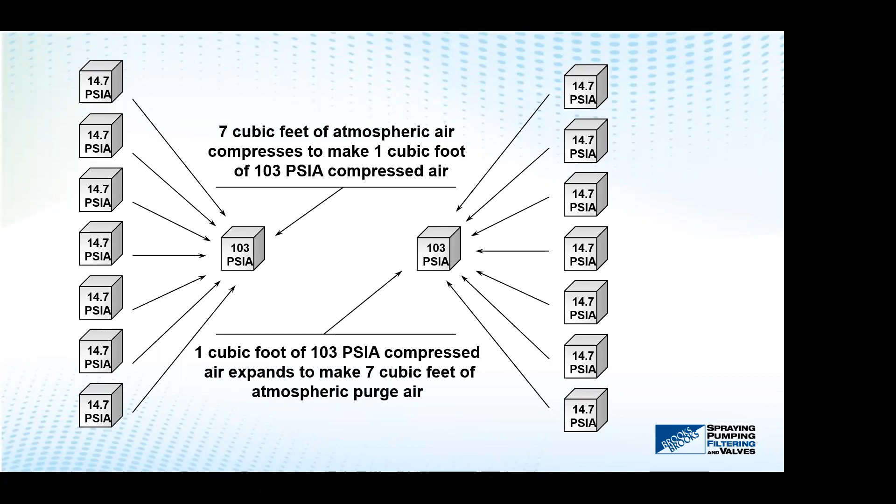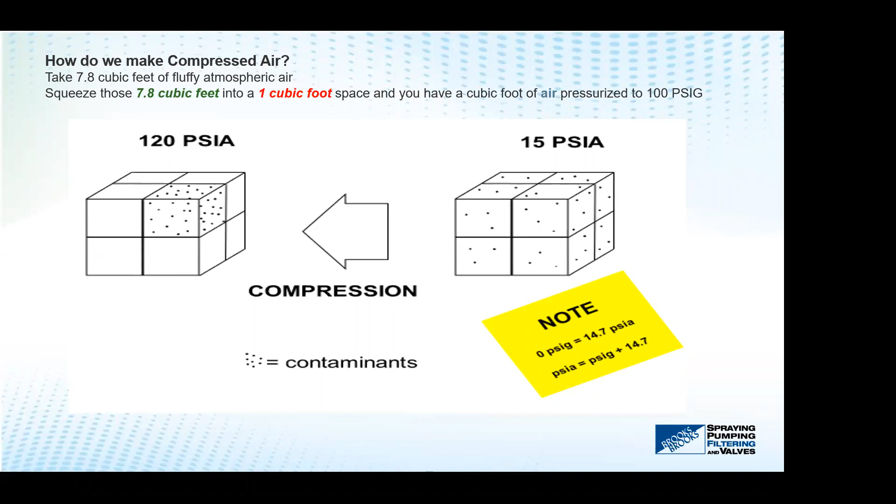Basic knowledge is that as we compress the air, temperature increases. The pressure increases, which is a normal factor. And the main factor that we're concerned about is that the contaminants in the air also increase approximately 8-fold, or 7.8 times.

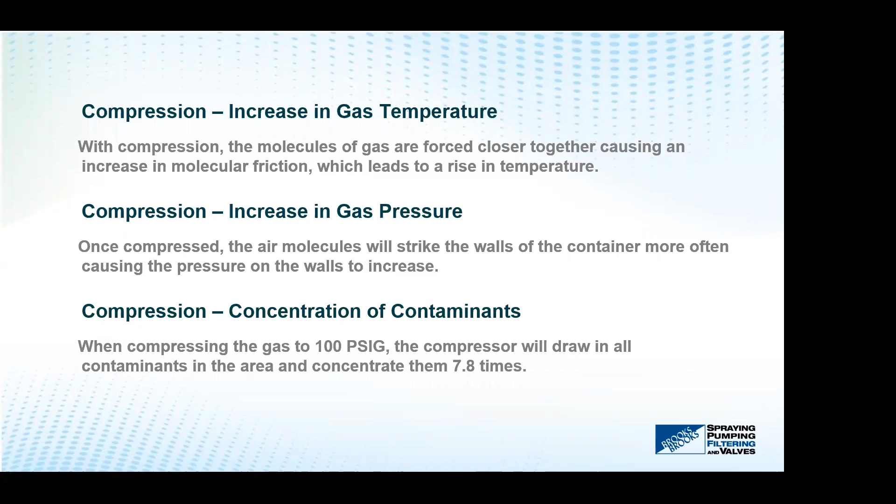The dew point of air is basically the transition point when vapor turns into a liquid, when the air can no longer hold that amount of moisture in vapor form and it changes from a vapor into a liquid state. That's when relative humidity becomes approximately 100%, and we've exceeded the saturation point of the air, so it can't accept any more moisture. That's illustrated on the following slide.

At minus 40 dew point, the air is relatively dry. This illustration shows that when you expand that air from a minus 40 dew point, 7 times larger, to atmospheric pressure, the dew point actually gets drier. As previously stated, when we take atmospheric air, which we don't see the moisture in, and compress it to 100 psi, we get condensation, we get saturation. So if you have dry air at a minus 40 dew point and expand it to atmospheric pressure, the air gets drier because now you have 7 times more volume for that same amount of moisture that was previously dry to a minus 40 dew point.

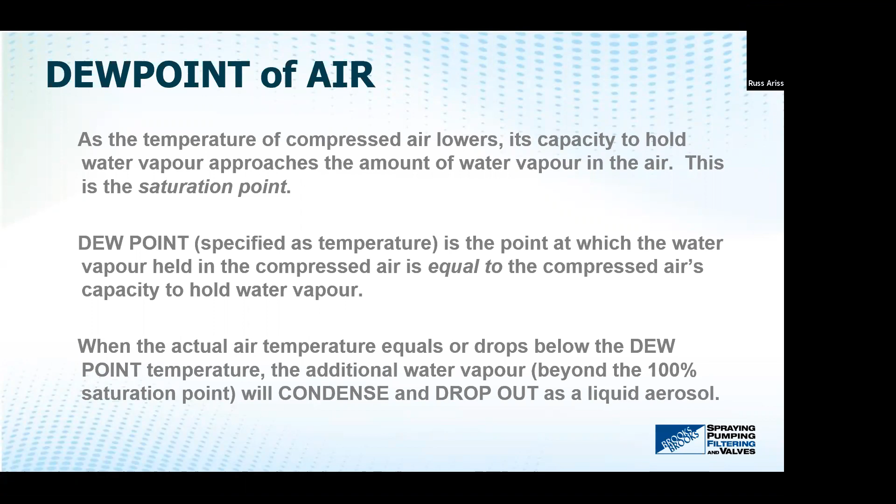The following illustration elaborates on the typical purification systems designed for instrumentation air. We try to attain a -40 dew point, and as previously stated, that's the temperature when condensation occurs. You would not get any water droplets or the change from vapor into liquid form until you descended the temperature below -40 degrees Fahrenheit.

Sometimes we get instances where, Russ, you indicated earlier this week, people were assuming they were getting good dew point, but they were perhaps reading atmospheric pressure instead - we'll see that better on the next slide. This image further shows that a -40 dew point at 100 psi, once expanded to atmospheric pressure, since we have 7 times more volume, the actual dew point gets lower since we're expanding that air to a lower pressure.

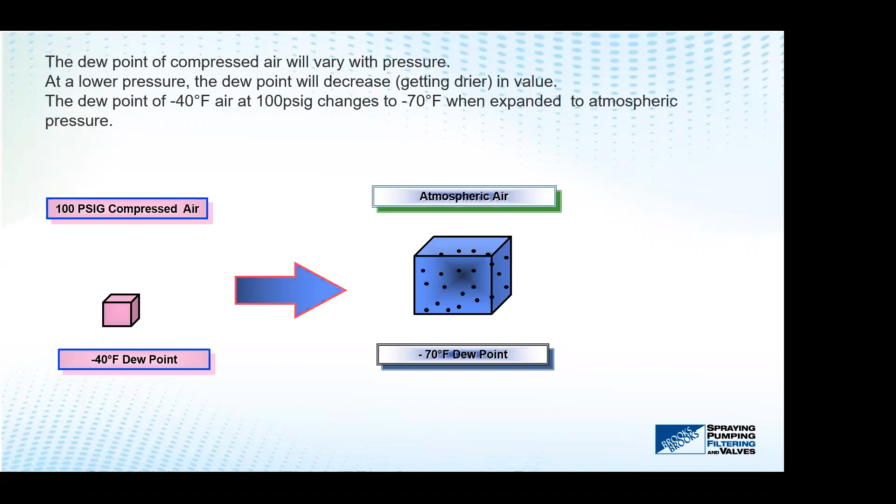This illustration again restates that a -40 dew point at 100 psi is the same as a -70 dew point at atmospheric pressure.

Similarly, if you're filling the air in your tires, or painting your home, it all has a consequence of the moisture content. Ideally, you shouldn't be filling your car tires on a hot, humid day, because then you'll have a certain potential of water formation inside your actual tires, even though you're only pressurizing it to 30 psi. The goal is always to get a compressed air source at the driest time possible, so there's less likelihood of liquid formation once it gets compressed 7-fold and is at approximately 100 psi.

To give you a typical in-the-field example of where I've seen the effects of pressure affecting dew point: I visited a refinery one time because they were having difficulty. The piping in a refinery is exposed to ambient temperature, and they were reading -40 dew point on their hygrometer, the instrument used to read dew point. Yet out in the field, instrumentation was freezing up. The reason is because they were reading -40 at atmospheric pressure. If you took that up to 100 pounds and went across, that would be around +10.

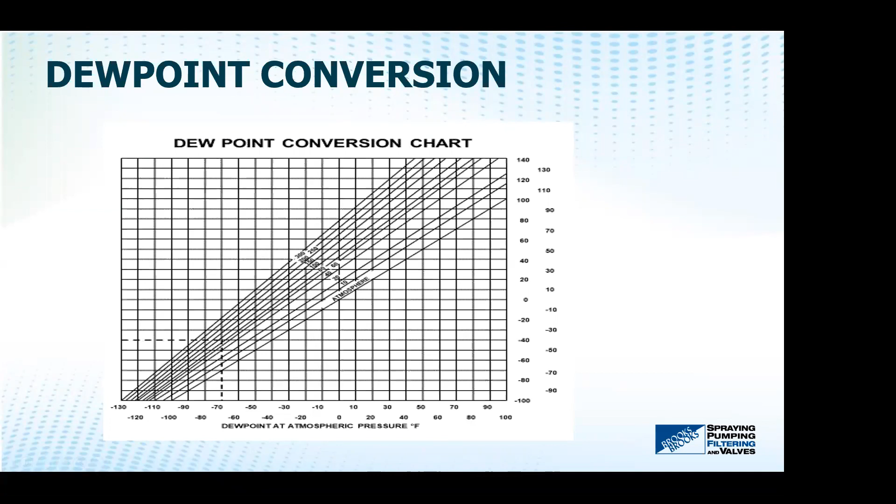As I previously stated, some of the contaminants I'm elaborating on consist of water. Even though we may not see water as a contaminant, in compressed air it is. The other contaminant is oil, and water and oil can exist in the form of vapor, aerosols, or liquids.

The other contaminants in compressed air are particulates. It could be rust scale, pipe scale, dust, anything that the compressor introduces into the compressed air system.

This visual presentation shows that we get oil from oil-lubricated compressors, but in reality, being in big cities or locations where there's hydrocarbons, when you compress atmospheric air, if you're near a highway or something, there's a certain level of hydrocarbons from the pollutants, and you would still get a certain amount of oil vapor or hydrocarbon contaminants just due to the pollution that exists in municipalities.

So even though you may think you're getting oil-free or clean air, in certain circumstances we would still recommend carbon towers or something similar to polish off any additional hydrocarbons from the compressed air system, even though you have an oil-free compressor.

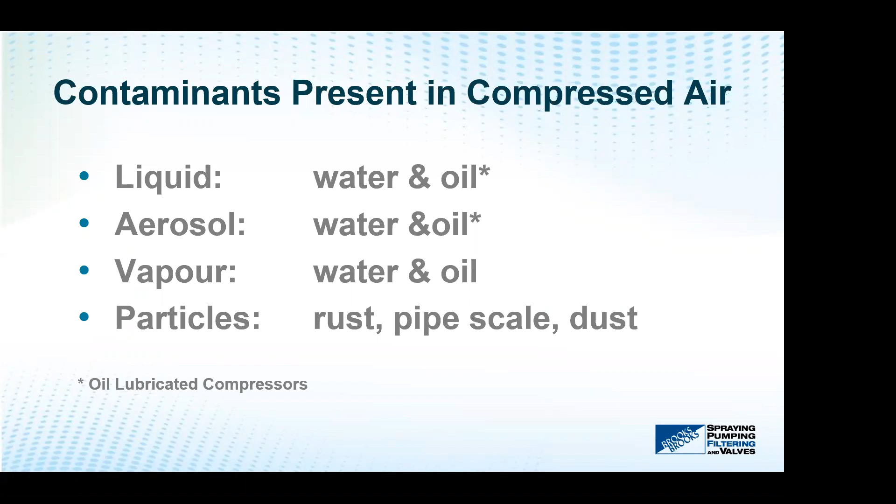What are the consequences, or why do we want to purify our compressed air? We want to prevent erosion, corrosion, freezing, and product contamination. That all occurs due to the contaminants in the compressed air system. It could be due to liquids, water vapors, or chemical contamination. And when you compress the air, it's all increased by 7-fold.

Russ, you were saying some of the consequences of corrosion—was it corrosion or erosion? I always get the two mixed up.

Well, they're kind of married in a way, because if you have corrosion in your compressed air lines, and you have particulate, the particulate is going to fly down the pipe at extremely high speeds. So if there are elbows or changes of direction, or you have to pass through valves, this particulate load actually multiplies itself as it flies down the pipeline, because it erodes pieces of the pipe. So what you have is this big particulate load flying down to your application, whereby possibly you have filters on the pipeline, but they're going to load up fairly quickly with this contaminant and cause a lot of pressure drop, which equals harder work for the compressor, which equals more energy costs. So the corrosion-erosion relationship kind of goes together, and it's one of the ones that I see quite often causing people significant problems in the plant.

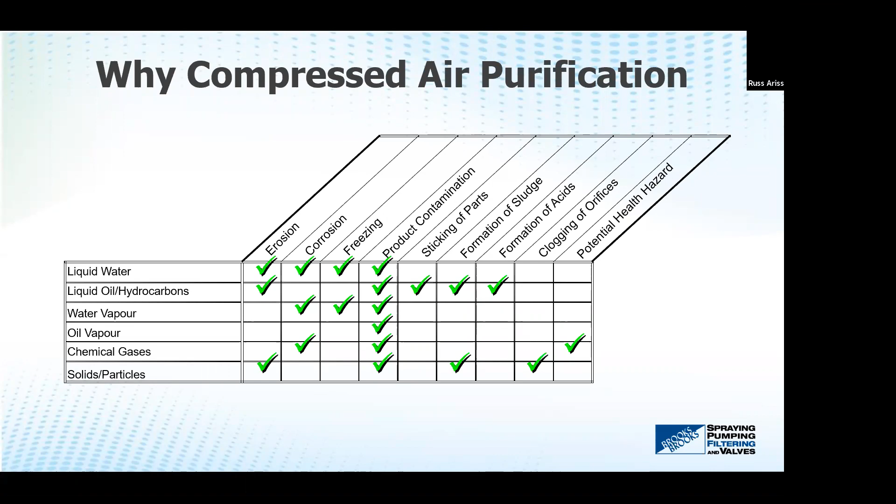Good point. Just looking at this slide again, it indicates potential health hazards, and I always like to bring up this scenario. This one correlates chemical gases with potential health hazards, but similarly, just having liquids or moisture in your compressed air system can also cause potential health hazards. We'll see this a bit further down in future slides. All hospitals have compressed air purification systems. All dentists have compressed air purification systems, just to assure that the moisture content is so low in the air lines that there'll be no bacterial growth. So I think we should put a check mark also in liquid water for potential health hazards on the future presentation, because it's not only caused by chemical gases.

The rule of thumb is that for every 20 degrees Fahrenheit we increase the temperature, we double the moisture holding capacity that air can hold from a vapor form and then into a liquid form. Or inversely, if we decrease the temperature 20 degrees, it can hold half of the moisture holding capacity. So basically, if you drop the temperature down by 20 degrees, those vapors will condensate and turn into a liquid form. So the 20-degree factor is the maximum holding capacity in a vapor form that the air can hold.

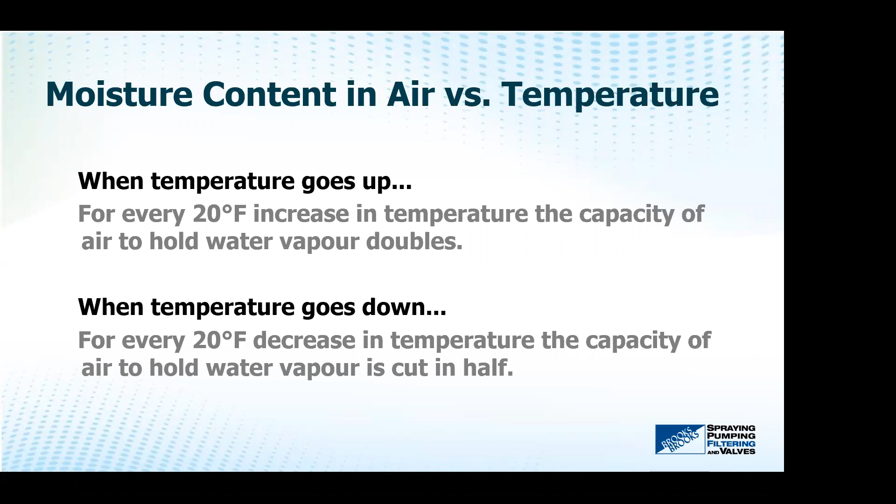It's a bit better illustrated on the following slide. On this slide, we see that at 100 degrees Fahrenheit, the maximum vapor holding capacity of air, not only compressed air but general air, would be 21 grains per cubic foot. If we were to lower the temperature down to 80 degrees Fahrenheit, it would be only approximately 11 grains per cubic foot as the maximum holding capacity. So if your dew point was 80 degrees Fahrenheit and your actual temperature is 100 degrees Fahrenheit, you would basically have a 50% relative humidity in your air because you're at approximately 50%.

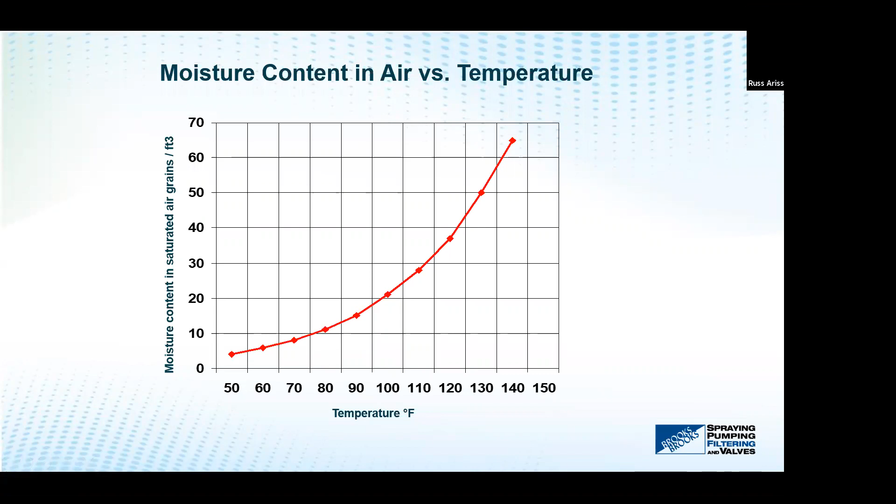Relative humidity is always expressed in percentage, and it's relative to the temperature of how much moisture the air can hold. So relative humidity will always have the maximum holding temperature, and if your dew point is 80 degrees Fahrenheit as previously shown, you would have approximately 50% relative humidity.

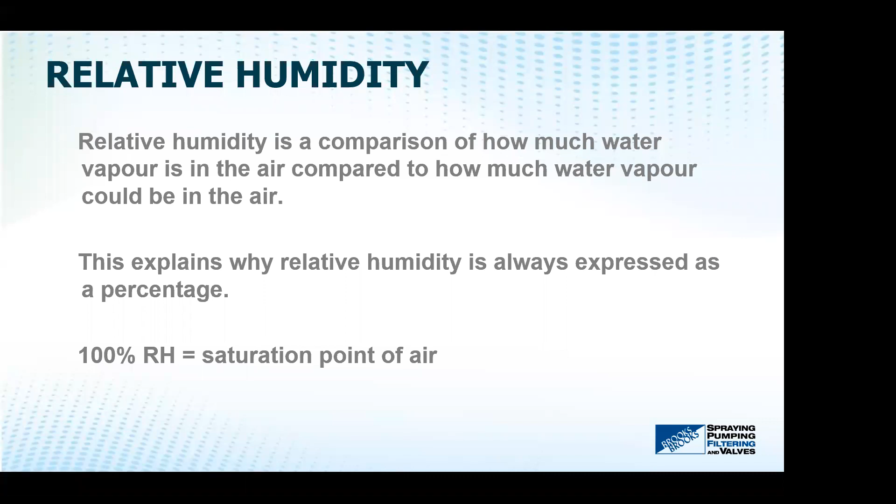It's a bit more clearly stated on this slide here. What I tried to indicate is if your maximum capacity is at 100 degrees Fahrenheit, 21 grains per cubic foot, and your actual dew point is 80 degrees Fahrenheit, you would have a 52% relative humidity. Similarly, if your maximum capacity or your airline temperature is 80 degrees Fahrenheit and your dew point is 60 degrees Fahrenheit, you again have a 52% relative humidity. But in reality, even though the relative humidity is the same, at 60 degrees Fahrenheit I have approximately 1/4 of the moisture content compared to the 100 degrees Fahrenheit. So if I had a dew point of 60 degrees Fahrenheit and my air temperature was 100 degrees Fahrenheit, my relative humidity would be approximately 26%.

So the point is that it's always relative to the maximum holding temperature, and that's what it's relative to. This illustration again shows that for every 20 degrees we decrease the temperature, we lower the moisture holding capacity approximately in half. So at 100 degrees, we have 21 grains per cubic foot. At 80 degrees, we have approximately 11 grains per cubic foot. And that's why it's important when sizing compressed air systems. We always try, from a performance standpoint, to get the air as cool and as dry as possible. But a bit further, we'll see that in reality, we have to size it for worst case conditions.

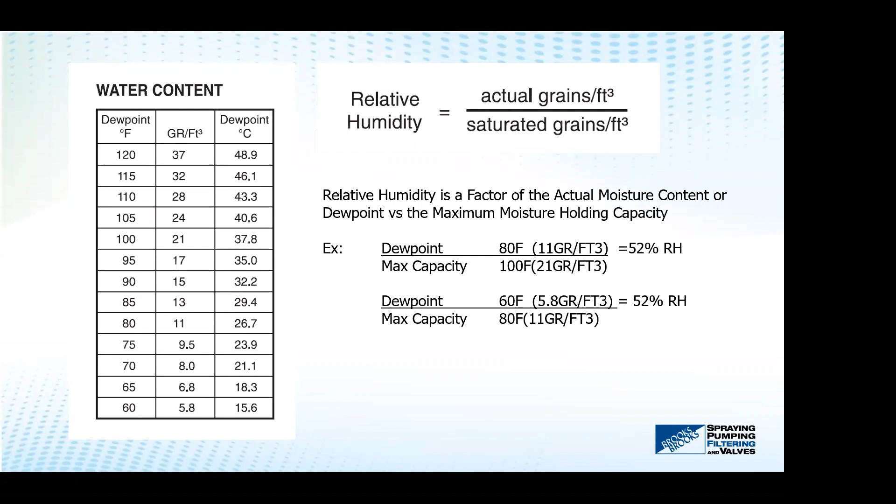Initially I was talking more about moisture and water and the consequences, but one of the negative consequences in the compressed air system is a lot of times we have oil lubricated compressors. And again, our goal is always to get the temperature down as low as possible so that we can change those vapors into a liquid form, and the liquid is a lot easier to filter out, or the contaminants are easier to filter out in a liquid form compared to in a vapor form.

So this illustration is just showing us that at 100 degrees Fahrenheit, we have approximately 0.62 ppm of oil in a vapor form. If our temperature was 150 degrees Fahrenheit, we would have approximately 5.8, or approximately 8 times more oil vapor. So it's a lot more cost effective to filter out oils when the contaminant is in the liquid form compared to when it is in the vapor form. That's why our goal is to try to get the temperatures down as low as possible to get that transition from a vapor into a liquid.

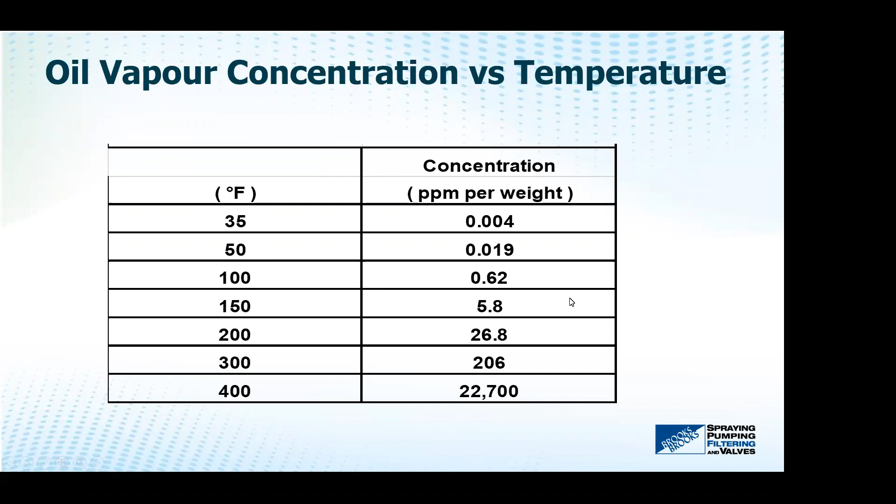Here's an example of a typically sized purification system, and again we're elaborating on the consequences of temperature versus flow capacity of a compressed air dryer. So here we're illustrating a compressed air dryer that has a capacity of approximately 3,800 SCFM at 100 degrees Fahrenheit, but would only have a capacity of 2,157 SCFM at 120 degrees Fahrenheit. So it's not exactly half the capacity, but it has a substantial negative consequence by operating your compressed air system at elevated temperatures. Again, it's just due to the fact that we haven't changed those vapors into a liquid form and removed them in a more efficient way.

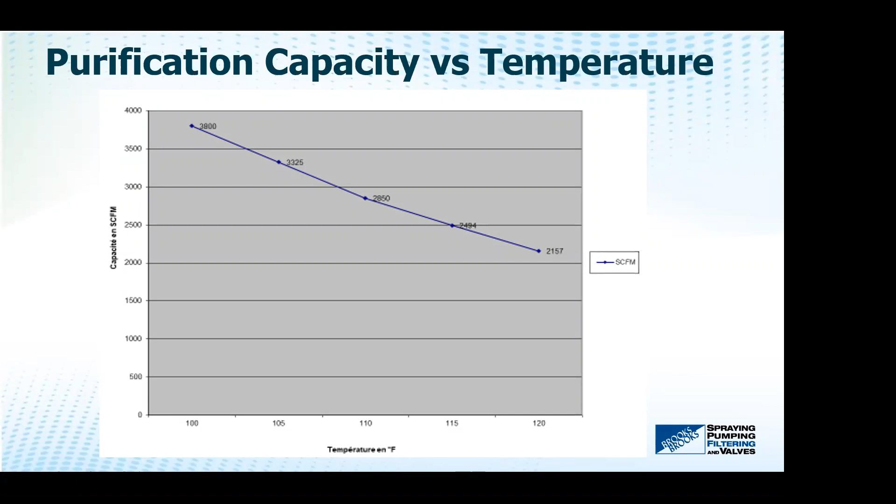Zenon, sometimes when I'm talking to a customer and they give me flow conditions, we're starting to see how important it is to not only have the flow that they expect to see, or the flow of air that they want to dry, but it's also important, as these charts illustrate, that we find out exactly what the inlet pressure range is, and exactly what the inlet temperature range is. So to give you an example, if a customer tells me, oh, I have 1,000 SCFM at 100 PSI and 100 degrees F, I always want to investigate that further and get a range on the temperatures.

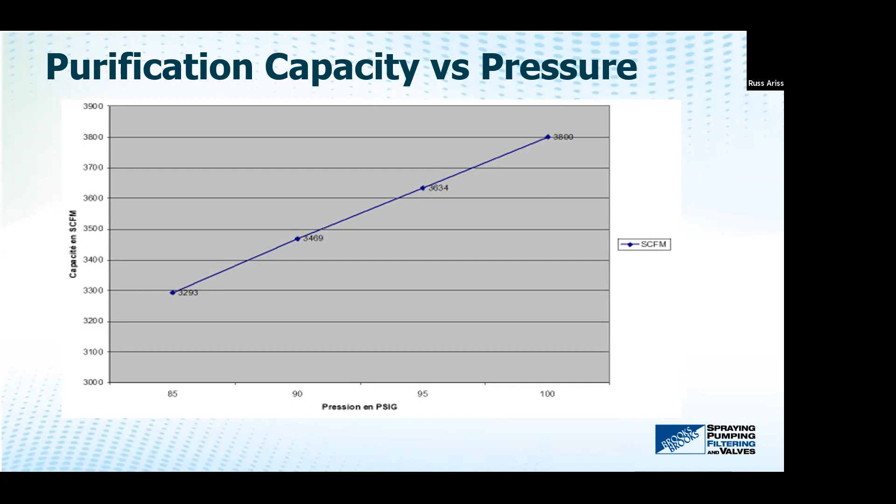For medical, dental, and food industry applications, we have to guarantee that there is no bacterial growth, so the relative humidity has to be below 10%.

In the market, there are typically two most popular designs of compressed air purification systems: desiccant dryers and refrigerant dryers. Desiccant dryers can get your dew points down to -40 Celsius. There also exist units that get it down to a -100 Fahrenheit dew point, or somewhere around -70 Celsius, for critical applications.

Limitations of refrigerant dryers are that they can't go down below 4 degrees Celsius, or approximately 38 degrees Fahrenheit, just due to their design. As illustrated, with a refrigerant dryer, your relative humidity at 21 degrees Celsius would be approximately 31%. With the desiccant dryer, you're down to 0.5% relative humidity, so you're below the threshold required for metallurgical protection and bacterial growth.

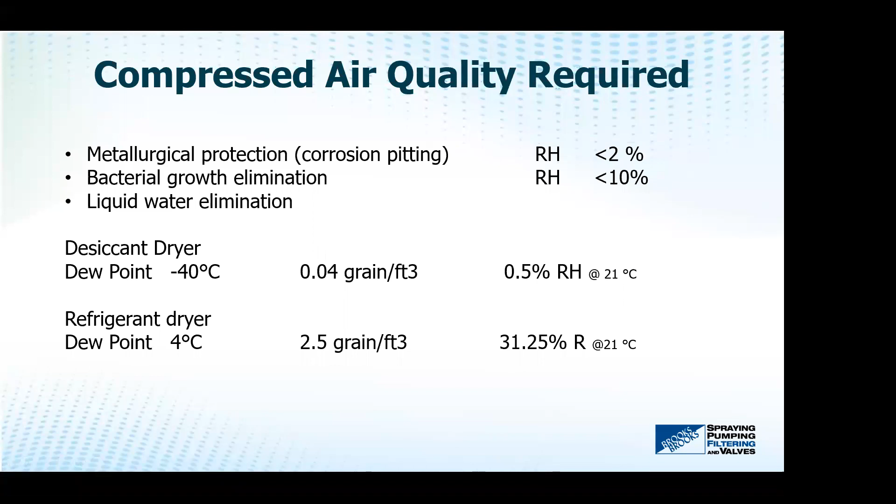So then we want to modify or change, reducing the temperature down from 350 degrees Fahrenheit to approximately 70 degrees Fahrenheit. So we would have water-cooled aftercoolers. The goal behind that is to change the water from a vapor state into a liquid state, and then it would be removed by a mechanical separator, which would have a drain valve knocking out the liquids.

Then in certain circumstances, we would have an air receiver. Air receivers are important to have to prevent the modulation of the compressor, so it's not kicking in and kicking out on a regular basis. This way it would load and unload after a certain amount of time, and again it's just another knockout pot to remove any liquids.

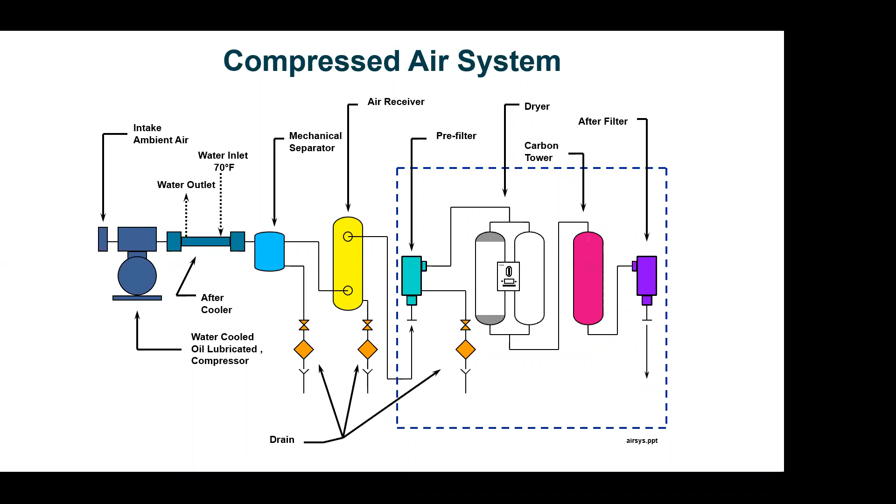But the general operational aspect of this unit is you have wet saturated air coming in, goes through an air-to-air heat exchanger, drops the temperature down to approximately 70 degrees Fahrenheit, using some of the energy from the cold air coming out to pre-cool the air coming in. And then it goes into a freon-to-air heat exchanger. This would bring down the temperature down to approximately 35 degrees Fahrenheit, or 3-4 degrees Celsius.

Since now we've cooled the air down as far as we can cool it down, we can't cool it down any further than 35 degrees Fahrenheit, or else there would be freeze up that would occur if you brought it down below the freezing point. So that's the limitation of a refrigerant dryer.

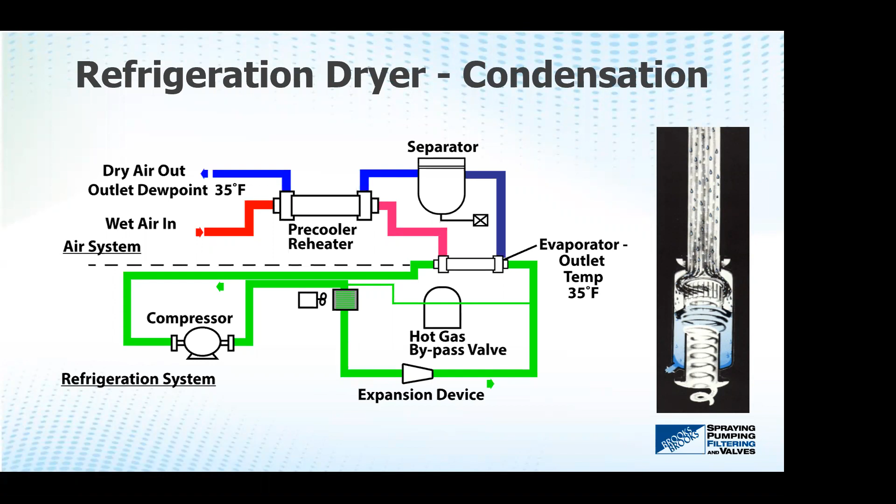Does that make sense? Russ, that's a good point. Typically those mechanical separators are rated at, I think, 10 micron, but that's when they're working at their maximum velocity. So as the velocity goes down, the centrifugal force goes down, and you're letting more and more water droplets go through. So instead of a stated 35 degree Fahrenheit dew point, you might get a 40 or even higher degree Fahrenheit dew point, just because the separator isn't properly removing those water droplets out of the airstream at that location.

And here we see, again, a typical dehydration system. As previously stated, the last line of defense is this coalescing filter. Prior to this we have mechanical separators and the receiver. One thing I didn't mention, which will follow in future presentations, is that the downstream items are very dependent on the previous items. So if your mechanical separator isn't knocking out the bulk liquids, this filter will be overloaded. This is your last line of defense, the last location where there's a drain valve to remove actual liquids. Desiccant dryers are not made for liquid removal.

I'm not going to get too much into this since our time is running low, but as previously stated, we were elaborating on how dew points change from atmospheric pressure to line pressure and vice versa. So to give a quick resume: we have saturated air coming into a desiccant dryer, it goes through the dryer, you get down to a -40 dew point coming out of it, and that would be sent to your after filter. But you have to do a backwash because these vessels alternate from vessel to vessel.

As previously stated, a -40 dew point at 100 psi is the same as a -70 dew point at atmospheric pressure. So we would expand that 100 psi air at this location, and the air would become extremely dry, drier than the moisture content on the desiccant, and it would strip the moisture off of the desiccant bed and come out of the muffler. But this is just a little precursor to our future presentations, and that pretty much wraps up our webinar for today.

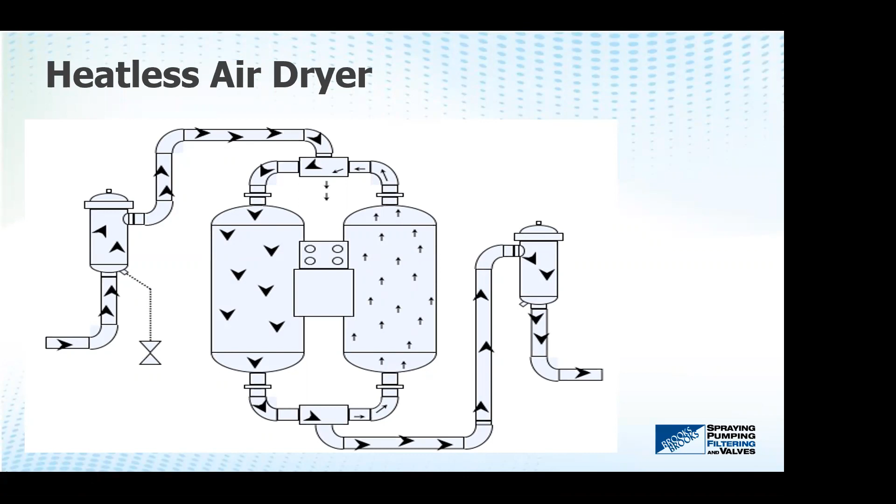Russ, is there anything else you'd like to add? No, I just think the main thing is that everybody understands how flow, pressure, temperature, and compression affect the amount of particulate, liquid, and vapor you're going to have to deal with downstream before you use compressed air in pretty much any facility.

Okay, thank you Zenon and Russ. Now in terms of questions and answers, we do have a few questions raised. One of the questions pertains to the scope of both supply and expertise. So is air dryer something that John Brooks would be specifically just looking at, or would you be able to cover other items within that compressed air process?

We definitely cover compressed air dehydration from a refrigerant standpoint, desiccant standpoint, but also John Brooks handles and takes care of atmospheric filtration. So we are multifaceted, if I can use that term. If you have chemical contamination in your ambient air systems, we have design engineers that work on those applications to assure there are no chemical contaminants going into the compressor. So we do pre-compression filtration and after-compression filtration. I'm hoping that answers the question, but we pretty much do it all.